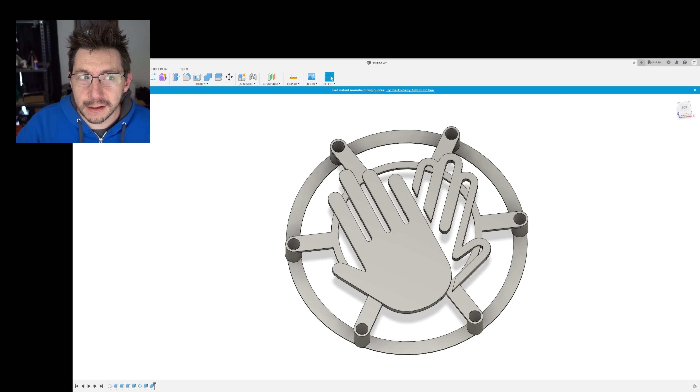I was contacted privately by a number of people who were a little anxious about designing something like this. So what I'm going to do, here, take a look. I've got this all set up. I designed this in Fusion 360 and it took me roughly 30 minutes. I'm going to take you through the process on how I did it, and maybe that'll inspire you and give you some tips on how you can do it as well. So let's get to it.

There you are, welcome back. We're actually at my house, and I'm upstairs in my office. We have pets, and the kids are doing digital learning or remote learning for school, and my wife's home, so you may hear some sounds. You may hear a dog bark, a cat meow, a child yell. Just know that this is real life, and things like that can happen.

But just like in real life, we have problems to solve. And have a look, isn't that great? Isn't that wonderful right there? So I'm going to take you through designing that.

And I just want to put out there right now, one, this is way easier than I even thought it was going to be. And two, you don't have to use Fusion 360. You can use whatever modeling application that you want. Let's dive in, this is it right here.

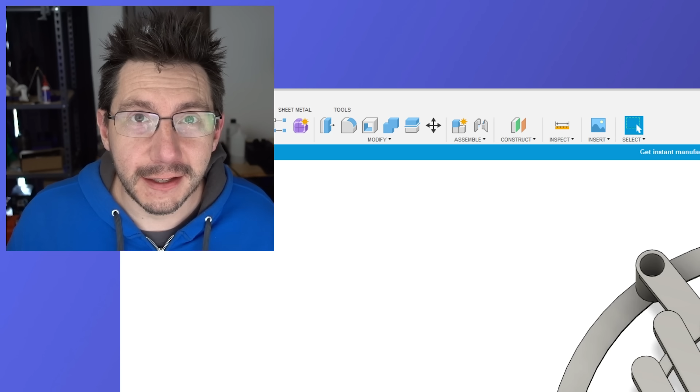And more interestingly enough, I want you to see this. Look at it, this is the sketch that I used in order to create it. And it looks really, really complex, but in the end it's not. It's not really complex, and allow me to lead you through this and show you how it's a little bit more simple than what this makes it out to be.

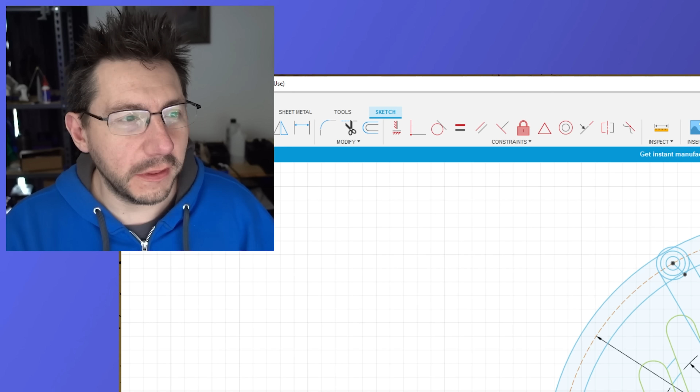First, what I'd like to do is create this outer circle. So let's just go for it. Ready? Create sketch, this plane, C for center circle. I'm going to click in the center and drag it out 166 millimeters. That's our circle, that's it right there.

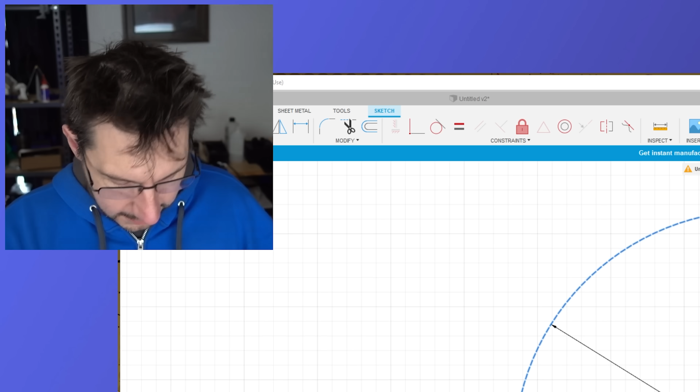Now what I'm going to do is click this and set line type to construction, because we're not actually going to use it for extrusion. We're just going to use it to create our points. And in fact, while we're here, I'm going to hit construction, L, and then pull out a line here and pull out a line here, and then turn it off.

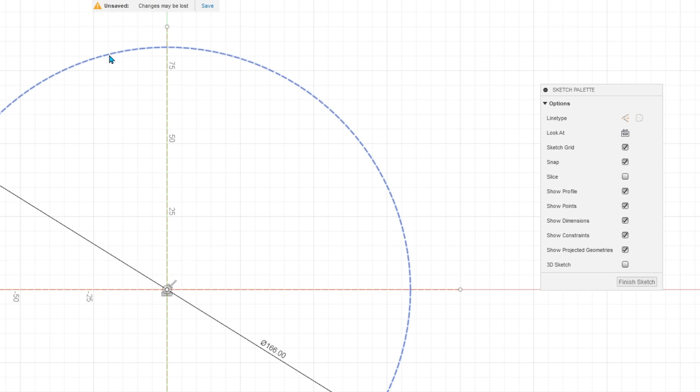This allows me ways to kind of interact and snap to the grid in certain places. As an example, if I click this and hit O for offset and go 5, and hit OK, that's going to give me my outer line. So I can click this, hit O for offset and hit -5. The center circle is 166 millimeters, and we offset 5 on this side and 5 on this side to give us kind of our brim.

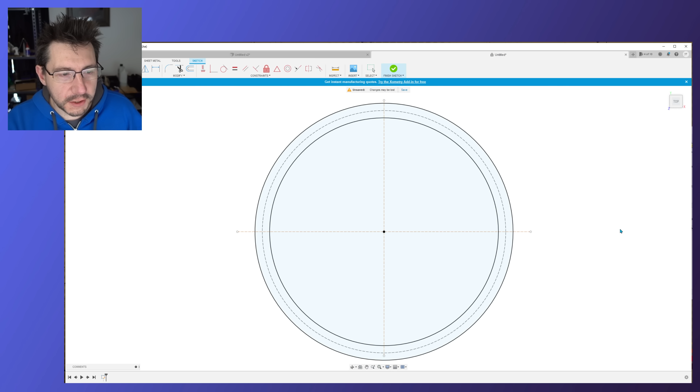In fact, let's just finish that right now. And if I click in here, I can extrude, and I'm going to bring it up 5 millimeters. Just like that, not too bad.

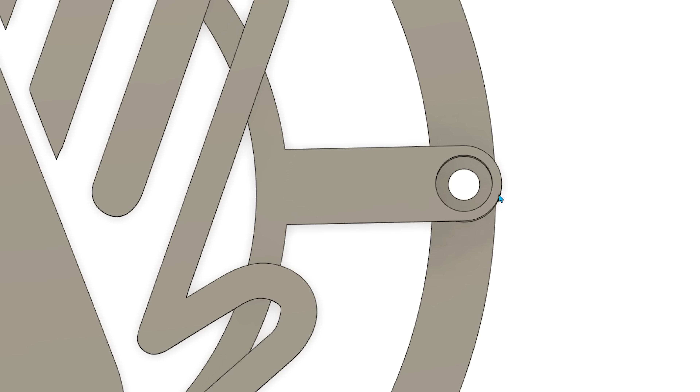Okay, so if I finish this sketch, then we've got our outer part here. Now we need to create these parts, these are the places where the screws go. And if you look, it's got our 5 millimeter hole. The screw head is 9 millimeters, or roughly a little bit less than 9 millimeters in diameter. So we can make this inner hole 9, and then we need to make this outer circle. Okay, let's get to it.

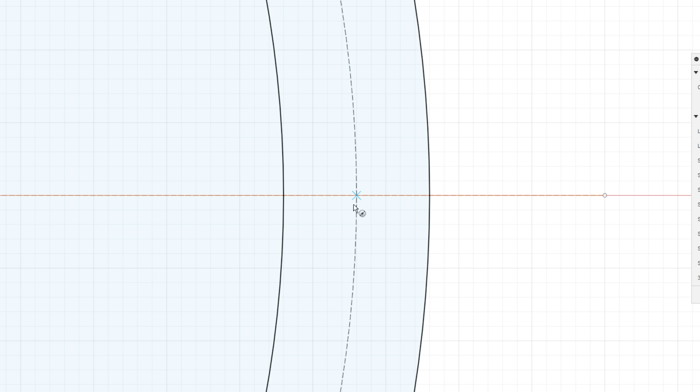So I'm going to go back into the sketch, and I'm going to start over here. I'm going to hit C for a center circle, zoom in just a bit, find out where it snaps right there. Bring it out and hit 5, because we want a 5 millimeter circle. That's where the hole is.

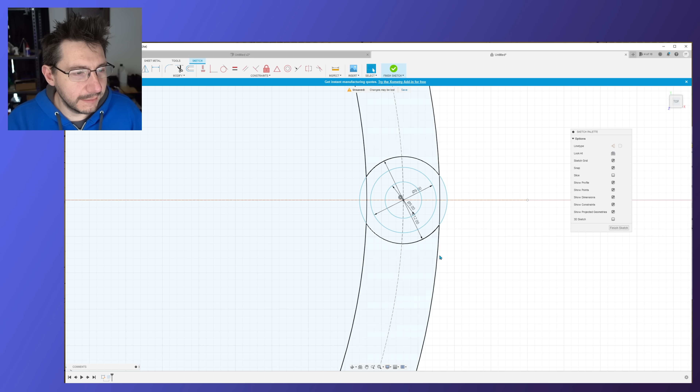Now we want to make sure we have the hole for the screw head. I'm going to hit C again, bring it out, and type in 9. And now we need to create that outer one. No problem, hit C, bring it out, and type 12. Well, that's easy. Okay, so let's finish that sketch. Here we go. So I want to extrude this part right here and right here.

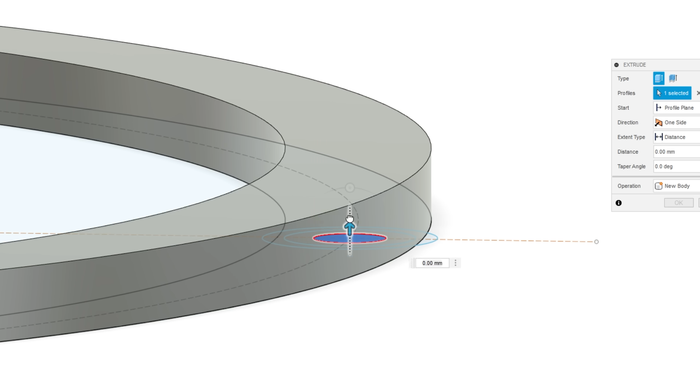Right, and we need to extrude that down. Okay, so we have two operations we need to do. Let's do this one first. So I will select that, turn on the body, hit E for extrude, and bring it up because that's going to create my cut. That's the hole that the screw goes through, and I'll hit OK.

Now what we can do is turn that off, select this, this, and this, and hit E for extrude, turn on the body, and bring it up, let's say 20 millimeters. And it's not a cut, we're actually going to do a join, just like that.

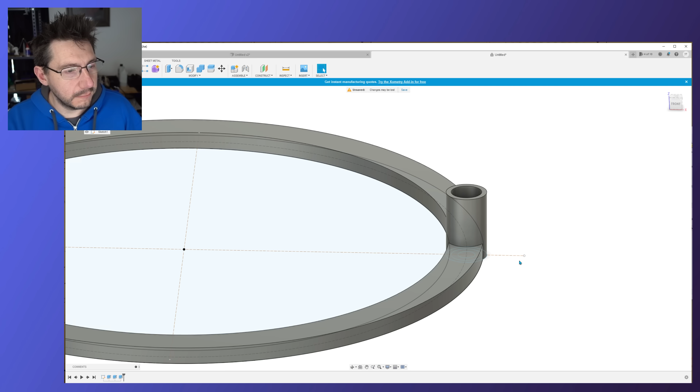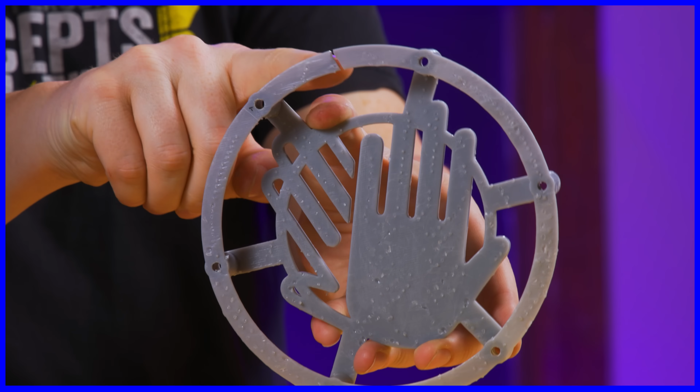That's kind of neat, right? In fact, that mirrors what we have over here. I did make this part a little bit thicker. Remember in the video, it cracked a little bit, it broke right there. So I've made it a little thicker here.

But here we go, we have that up 20 millimeters, and that looks really good. We have the hole in the right place, and we've got the container for the screw.

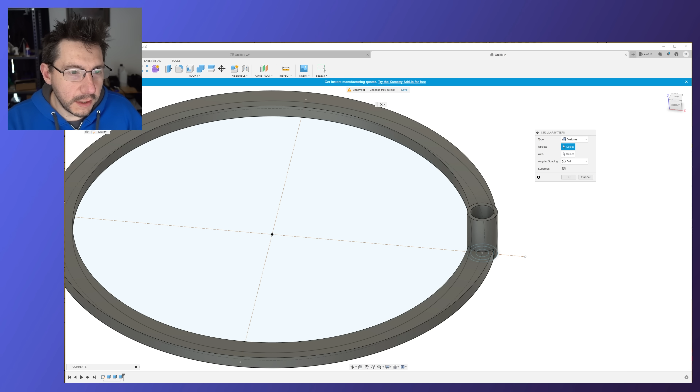Now what we can do is create a circular pattern. And instead of faces, we can take, I believe it's features, so the objects we want are this and that. We want the hole we extruded or cut, and the column that we extruded. The axis is going to be right around Z, and it's going to be six of them.

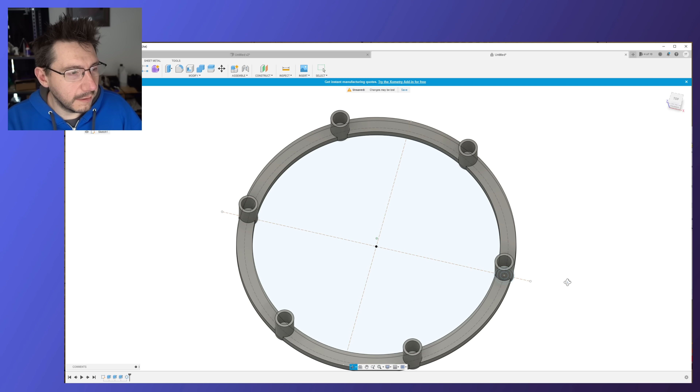Pretty easy, right? So everything's got the hole in the right place, and there's six of them evenly spaced. In fact, if we go back here, this is the one we created before, we're kind of in the right spot. We're doing pretty good, this part we've made better, and we have six of these evenly spaced around 166 millimeters. So we've got these, they kind of come in a little bit.

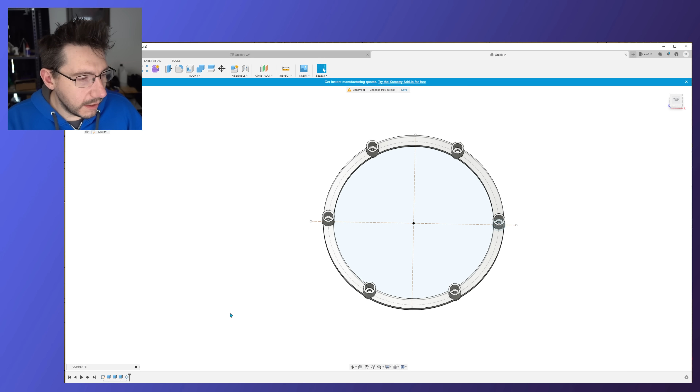So let's go back to the sketch. That center circle, this is that one right here, this center circle right here. If I go back, hit C for center, I'm going to bring it out 100 millimeters. Now I'm going to click that circle, hit O for offset, and go 5, just like that.

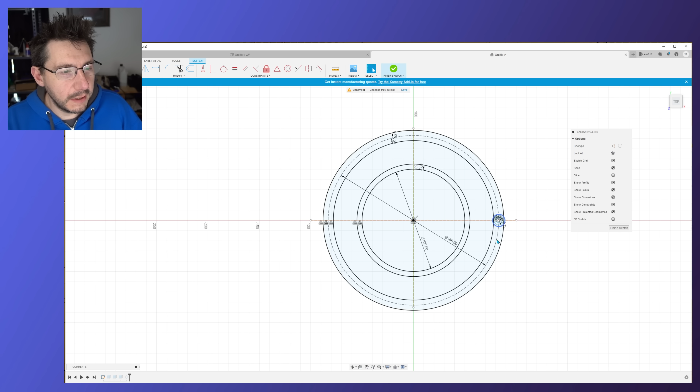So now we've made our circle, and now what we need to do is bring a line over to it where it meets up. So let's hit L for line, bring it out, and we'll just go along the grid lines. There we go, if we go along those grid lines, that keeps us where we need to be, and the lines connect up over here to this circle. Okay, so finish sketch, finish sketch.

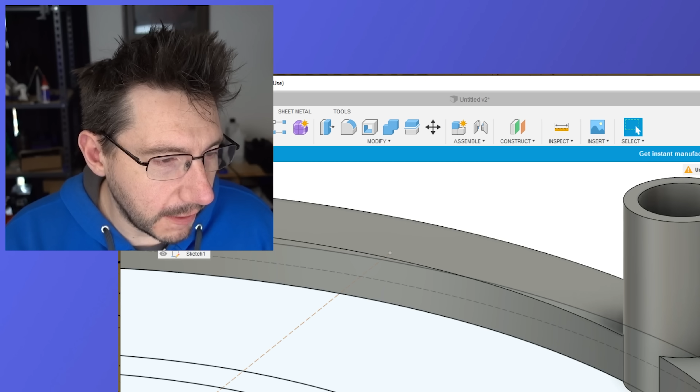We know that these were 20 millimeters tall. So if I come over here, I can hit E for extrude. Let's do 5, and we want it to be in the air. So what I need to do is start an offset.

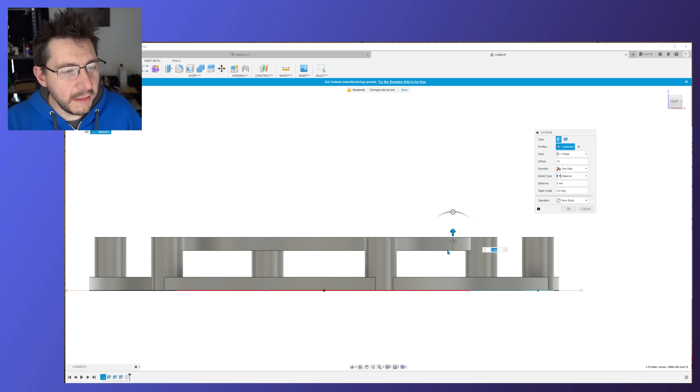And I need to start it. If it's 5 millimeters tall, and it's going to be, well, here, let's do that, 15. So have a look: this is 5 millimeters tall, and we're starting at 15 millimeters in the air, which means it's going to be level with these.

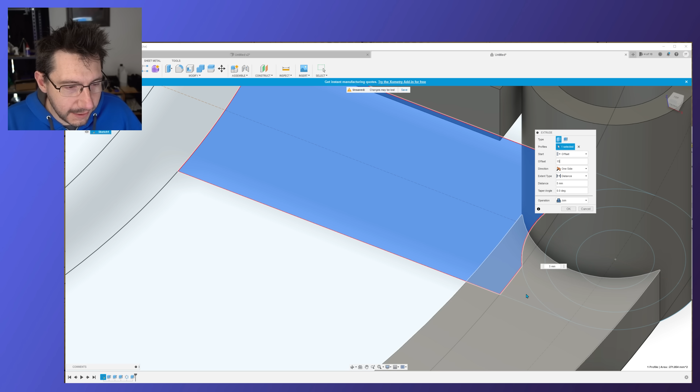So now if I go here and say extrude, I want those to be 5 as well. But then have a look, if I go offset and do 15 millimeters again, just to make sure I pick the right stuff. There we go, because I want those to kind of go in there too. Let's see, I want to go 15. Or the offset is 15, and the distance, oh my goodness, I'm getting mixed up here, is 5. Okay, and join. Whew, boy, we got through that.

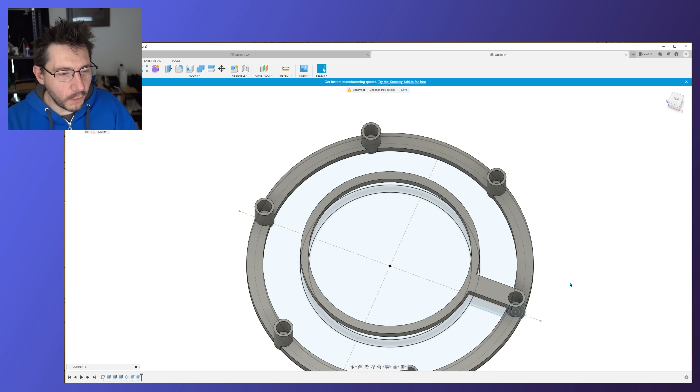But look, we've got that connector there. So essentially what we did is we used sketches here and an offset. So instead of just extruding to here, we said start here with this offset and then extrude that amount, which then puts these 3D objects in the air.

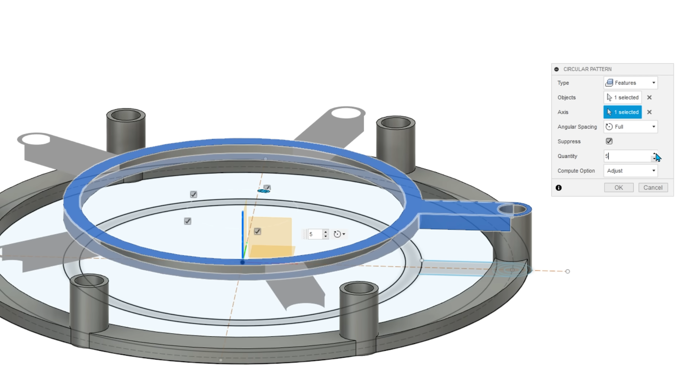So now what I can do is go to create, pattern, circular pattern. Again, features, it's going to be this extrusion. The axis is going to be the blue one, or the Z. And we're going to go 3, 4, 5, 6, and OK. So if I turn off this sketch right here, you can see we're starting to get somewhere, right? This isn't so bad, have a look.

Looks pretty good, right? We're getting there. There's only one piece left to do, and that is going to be the high five hands. That's going to be an SVG. So let's go back to the sketch right there.

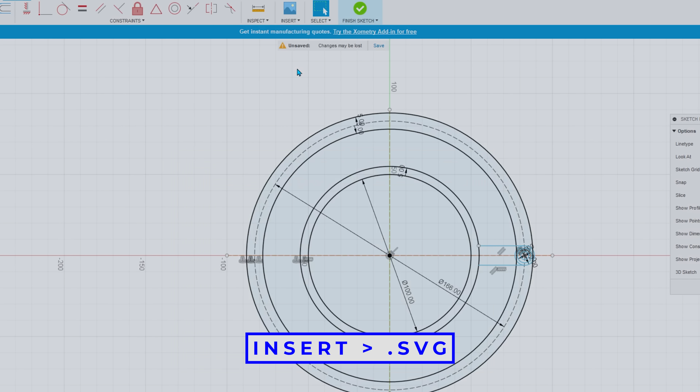I'm going to insert SVG from my computer. This you get to eyeball. This isn't super exact, you get to place things where you want it to be. I bet you see where we're going with this, right? I bet you see it.

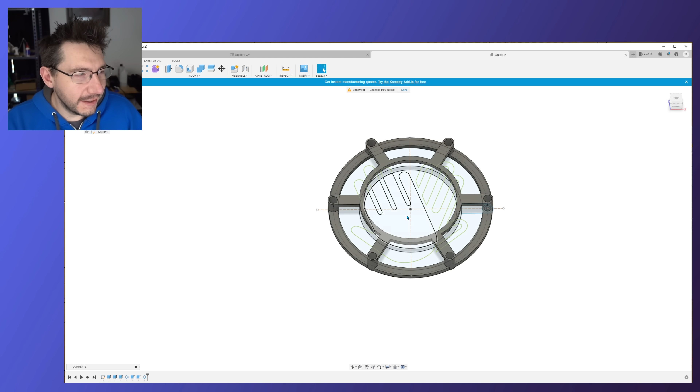So let's turn the sketches back on. What are we going to do? We're going to do our extrusions, into the air. Let's turn off the bodies, and select all the parts that we need to extrude. One thing to remember, that circle is already up there, so there's really no need to extrude anything within that circle. We just need to get the parts of the hand like that. I hope that makes sense.

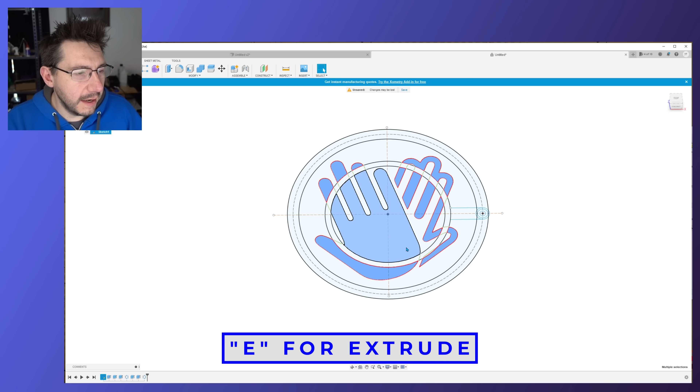So hit E for extrude, turn on the bodies. Just like that, we're going to do a distance of 7 first. Then the start is going to be offset, and we're going to do that 15 millimeters we talked about before. Finally, the cut is going to be a join.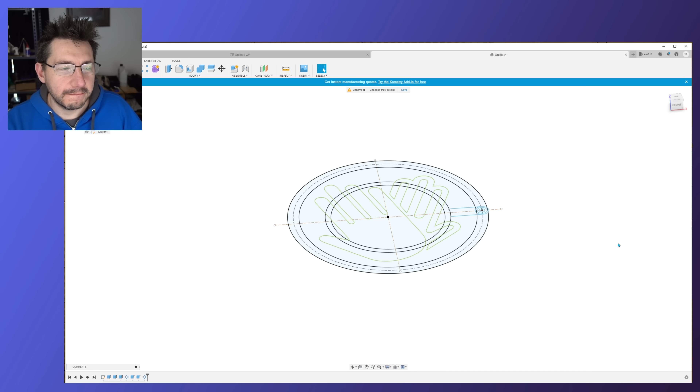Oh, you know what, let's go back. One of the things that I forgot about, and this is the beauty of CAD, you can go back and adjust things. So I just hit cancel. What we want to do is select the parts of the hand or the hands that we want to extrude. Let's see, that one, that one, that one, this one, this one.

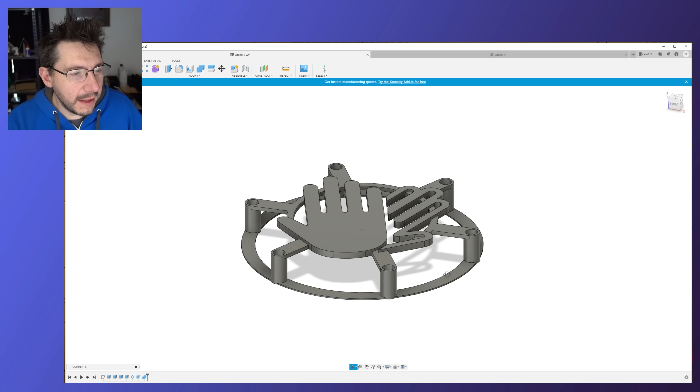Now, remember I said we didn't have to extrude the circle because it was already up there. But if we look at the other design, the hand is higher than the inner circle, so we still need to extrude those. These are all going to be joined, so it won't matter, but we still need to do that. So this one, this one, this one. You see where I'm going. Zoom way in, make sure you get that one. And that one. There we go.

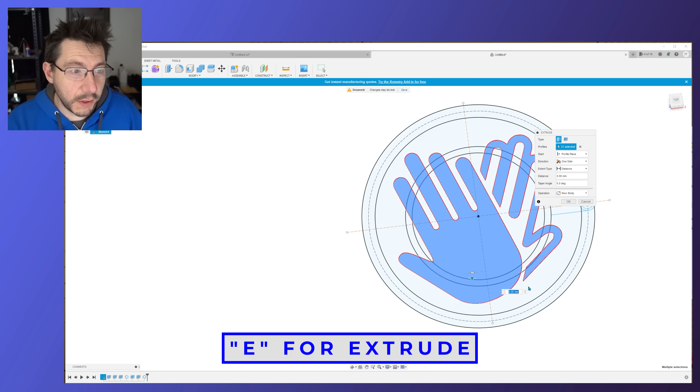E for extrude, turn the bodies back on. It's going to be an offset plane. The offset is 15 millimeters, just like we talked about before, and the distance this time is 7. Change it from a cut to a join.

Look at that, you can see it right there. See how the hands go up over the inner circle. Hit OK.

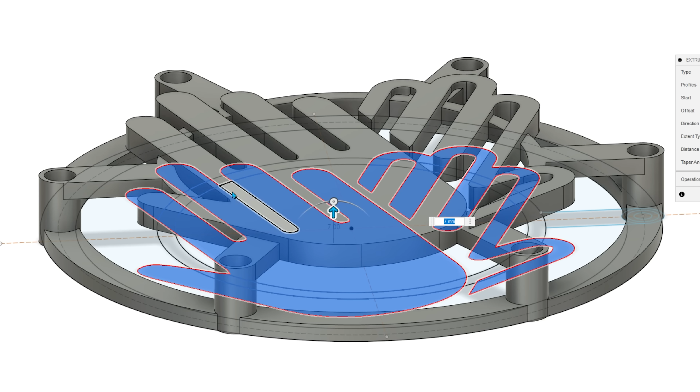Did we just design it? Did we just design that? Okay, let's take a look. Here's the one I did before. Here's the one we just did. We did it, and it didn't take much time at all. Look down here, very few steps to do this.

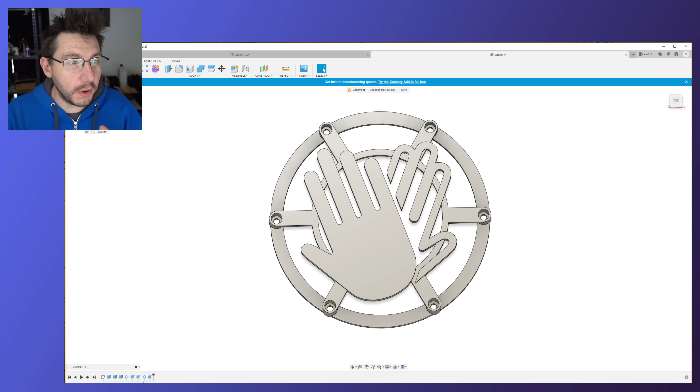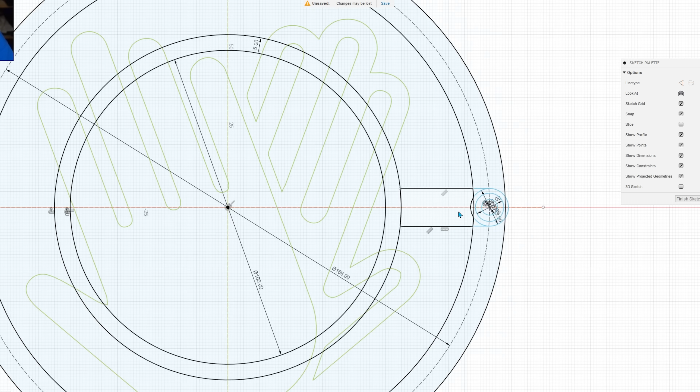One of the things I wanted to showcase, that's probably one of my favorite things to learn, is patterning. In a sketch, let's take a compare. When I first did this, all of my work was done in this sketch and I laid everything out, and I didn't use patterning at all. Now if you go here, look at the sketch, look how much easier that is. We defined our big circle, we only defined this once, and then we brought it all in. Oh, and we did it in steps.

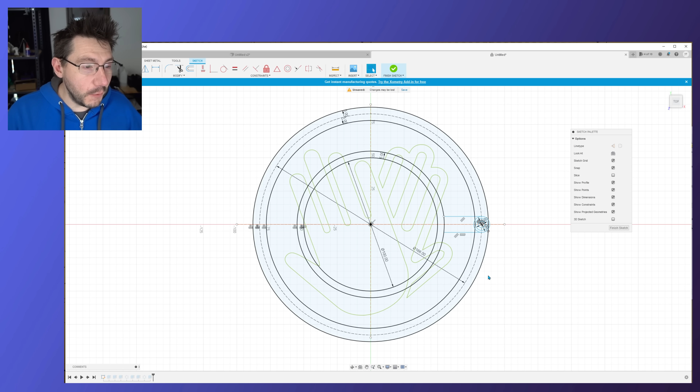I really want you to know that I am truly feeling bliss right now, because not only am I showing you something and you get to learn from it, but I'm also learning along the way as well. And we just simplified the process. We made it easier, and now we're dangerous.

We are dangerous with this information, because this you can save as an STL and print out. Now you can bring in another SVG file and make your own. But using patterning now, instead of bringing these straight across to this inner circle, what if you kind of wiggled the lines a little bit? It blows my mind, that's where the exciting part is.